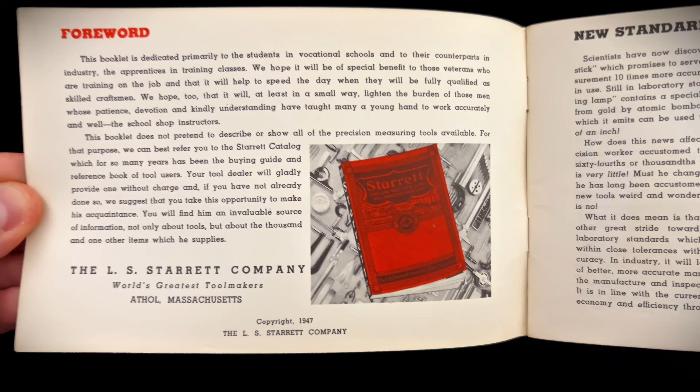Think about the last time you bought a new tool. You probably grabbed it off a rack in a big box store or ordered it online. It arrived in a sealed plastic clamshell with a barcode on it. You gave the company your money, they gave you a tool, and the transaction was instantly over. If you didn't know how to use it properly, well, that was your problem. Go watch a video and figure it out. That's the modern standard. But it wasn't always like this.

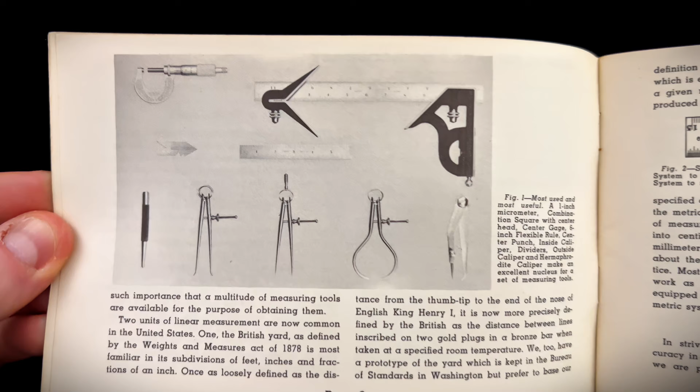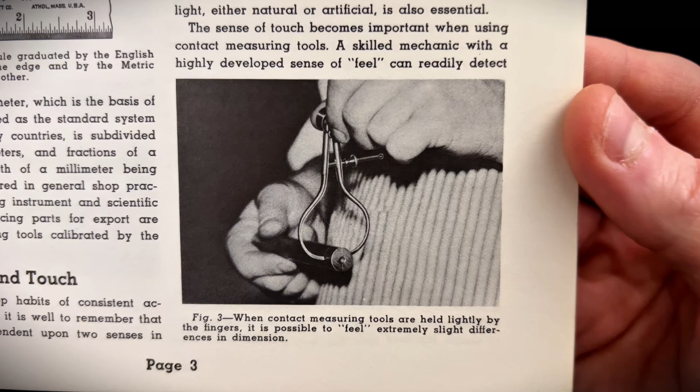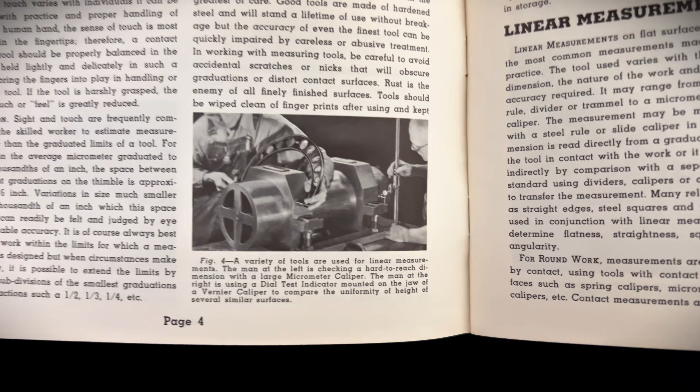There was a time when the company that sold you a tool also felt responsible for what happened after you bought it. Not in a legal sense, not because of liability, because they actually cared. If you go back to the 1940s, the relationship between the companies who made tools and the people who used them was completely different. Back then, when a company sold you a piece of precision equipment, they didn't just want to make a quick sale and move on to the next guy. And what you're looking at right now is proof of that.

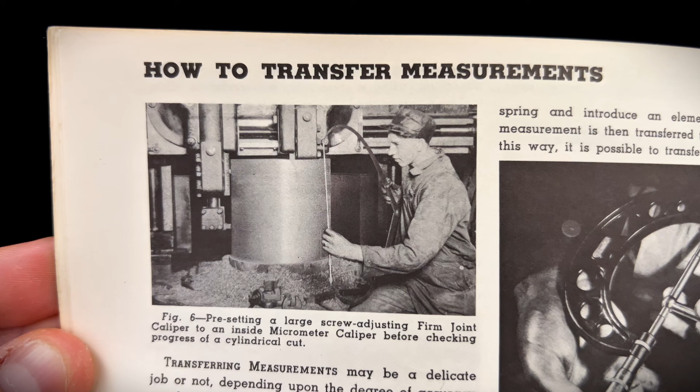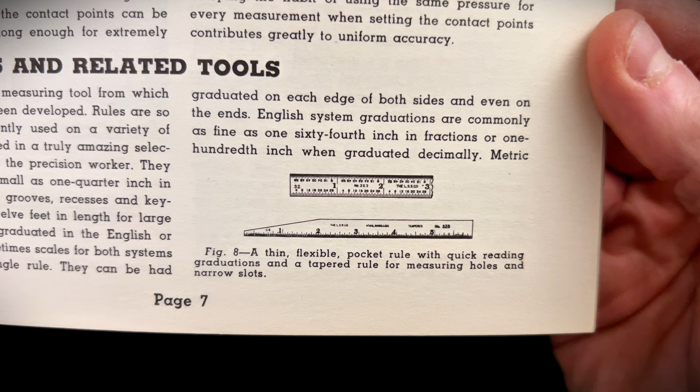This is a 1947 instructional booklet published by Starrett, one of the most respected precision tool manufacturers in American history. On the surface, it looks like a simple educational guide, or just an old catalog meant to sell micrometers and steel rules. But when you read what's inside, when you understand what they were actually doing here, it changes how you think about the relationship between a machinist and the company that equipped them.

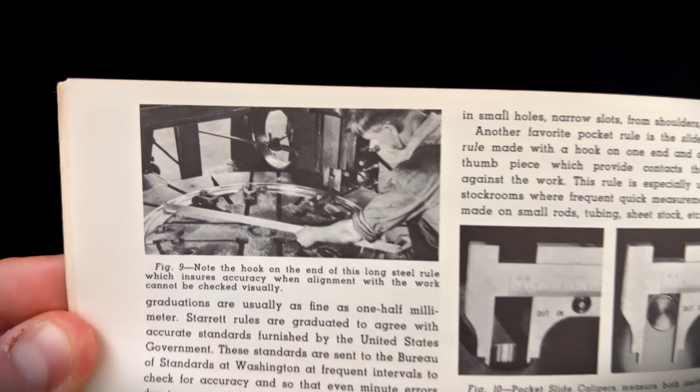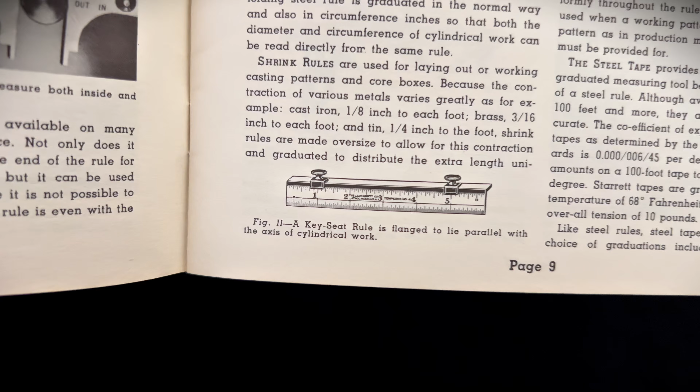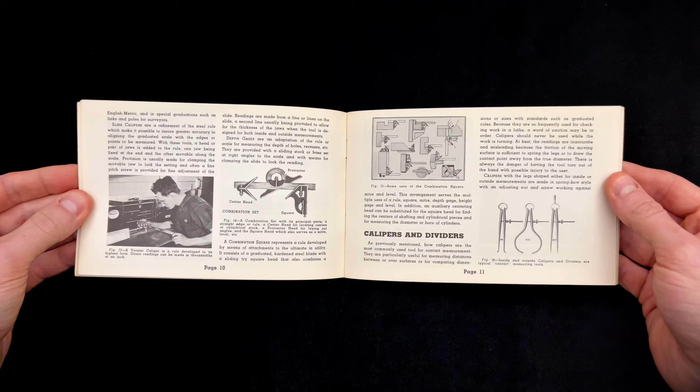On the inside cover, the very first thing Starrett tells you is who this book is for. They dedicated this booklet to the young people in vocational schools, to the apprentices on the factory floor, and to the veterans of World War II who were returning home to rebuild their lives in the machine shops of America. Think about what that means. They looked at a young person just entering the trade and said, 'We want to be part of your foundation.'

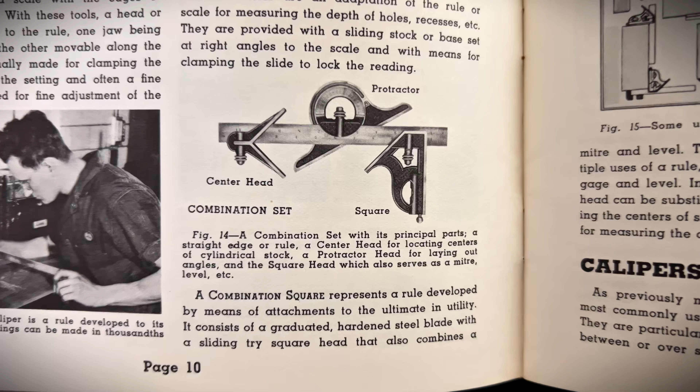We want to be there from the beginning. They also gave a specific nod to the seasoned tradespeople who were taking apprentices under their wing. Starrett understood that they were training the next generation of craftsmen and respected them. This booklet was, in part, a gift to those instructors, a resource they could put in the hands of every apprentice that came through their shop.

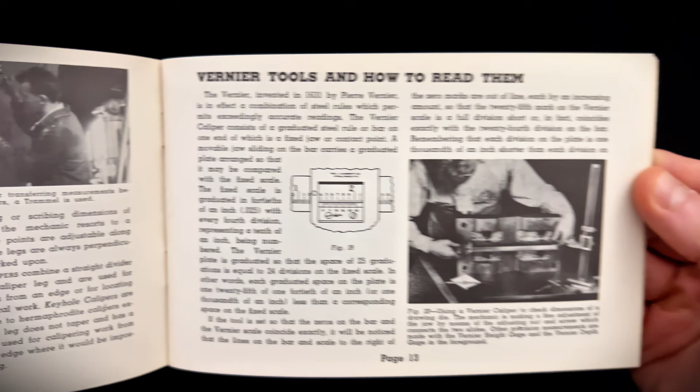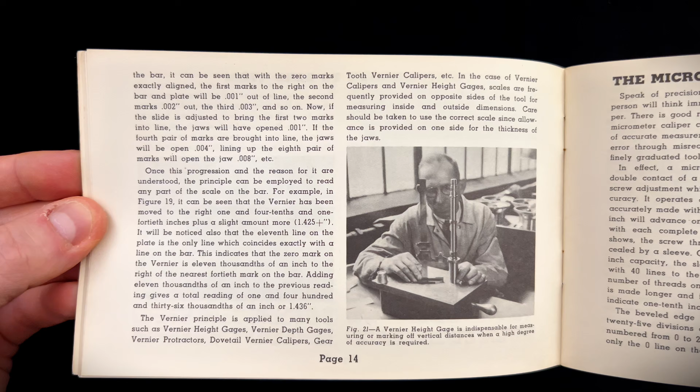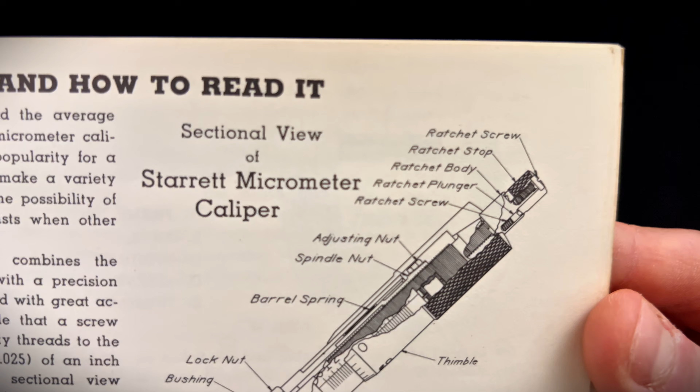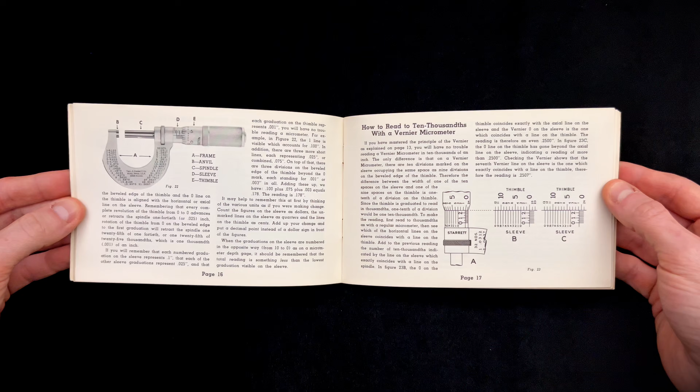The frame is the main body. The anvil and the spindle are the two faces that do the measuring. The part you turn is the thimble, and the main scale on the body is the hub. And then they include a step-by-step explanation of the measurement principle, taking it down so clearly that a first-year vocational school student could follow it. And to do this, they explain the classic dollars and cents method.

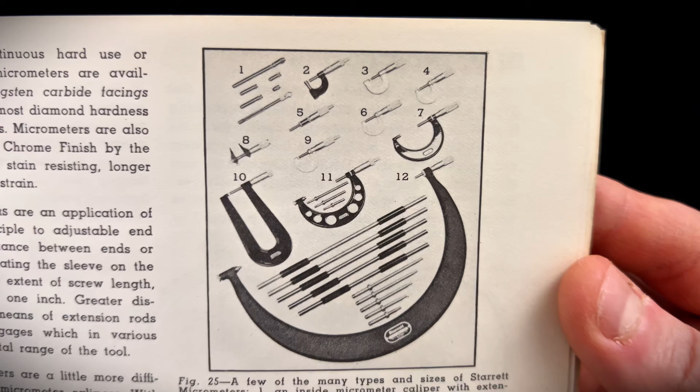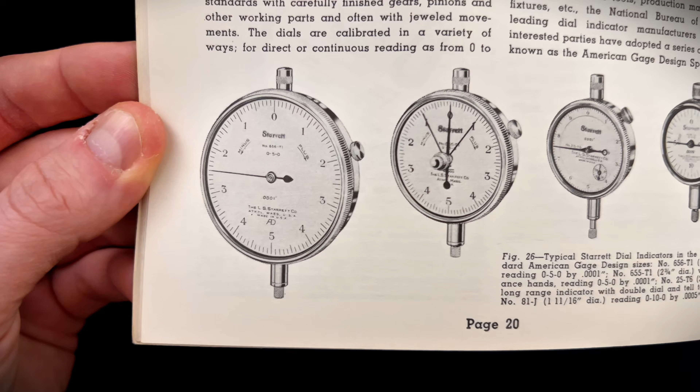Every full rotation of the thimble moves the spindle exactly 25 thousandths of an inch. The big numbers that run along the length of the hub are the dollars. So 1 is equal to 100 thousandths, or 0.100. The small lines between these numbers along the hub are the quarters, worth 25 thousandths each. And the numbers on the thimble, those are the pennies. Each one is 1,000th of an inch. That's the kind of care you would expect from an instructor, not an advertisement.

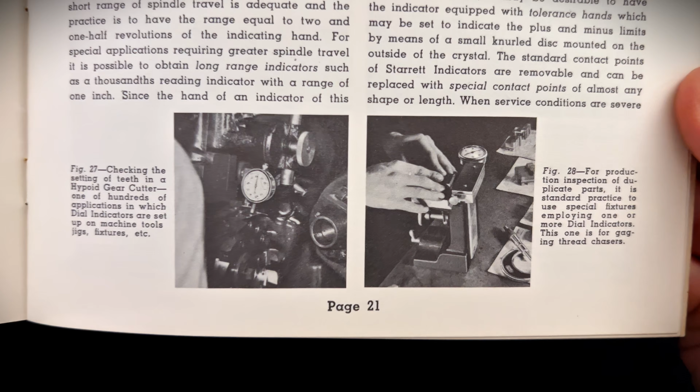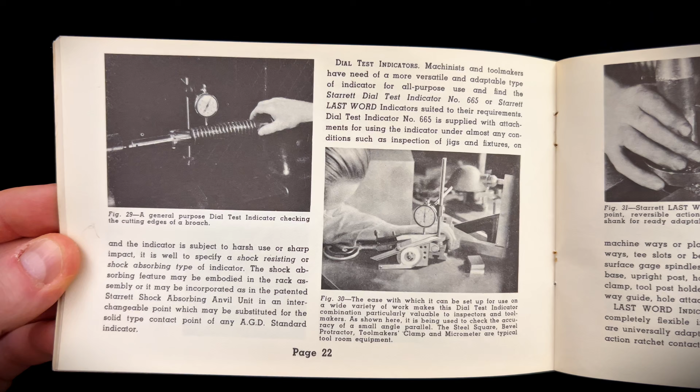But mastering the micrometer and other manual gauges wasn't just about doing the math. It was about developing the feel. Starrett knew that a micrometer measurement could easily be skewed or misread by heavy-handed ignorance. And that's why, in addition to reinforcing this throughout the booklet in the first few pages, Starrett dedicated an entire section to the importance of sight and touch, the two senses a precision machinist depends on.

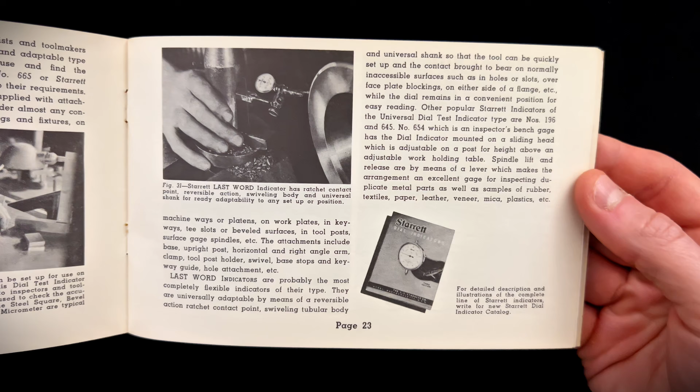They talk about how a skilled machinist has to develop their sense of feel in order to detect dimensional differences too small for the eye to catch. They describe how holding a contact tool lightly in the fingertips, rather than gripping it tightly, preserves that sensitivity.

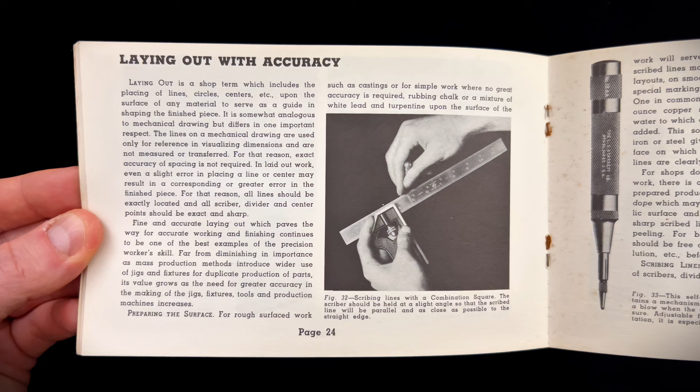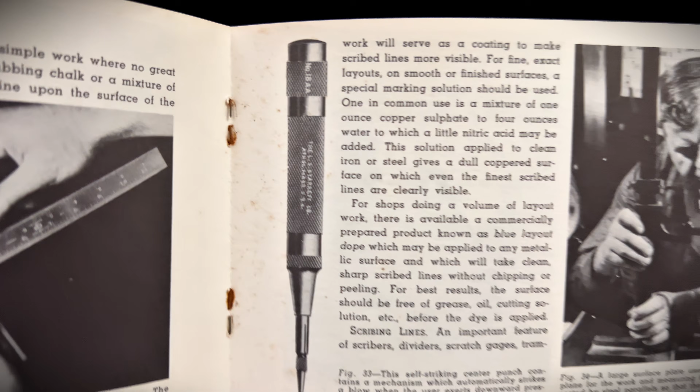They reinforce that a sense of touch can be developed over time with practice and patience. While this may be common knowledge in theory, the nuance of it is old-world knowledge, the kind of thing a master machinist passed down to his apprentice on the shop floor. Starrett put it in print so that every young man who opened this booklet had access to it, whether they had a mentor or not.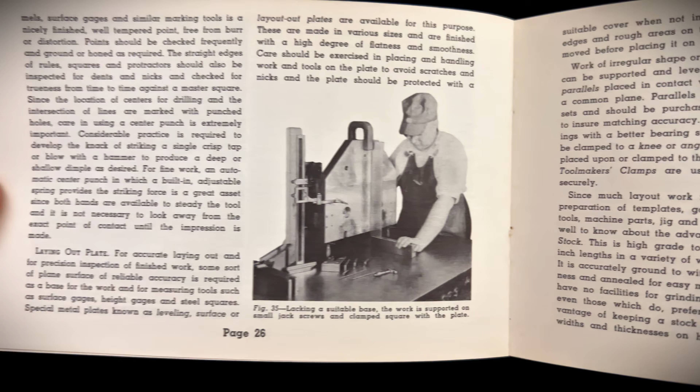By dedicating pages to the proper grip, the right amount of friction, and the deliberate calculation of the lines, they weren't just educating you. This also served as an insurance policy. This theme can be seen throughout this booklet. Starrett wasn't just printing these books out of the goodness of their hearts and care for their customers. There was a brilliant, calculated reason behind this level of education.

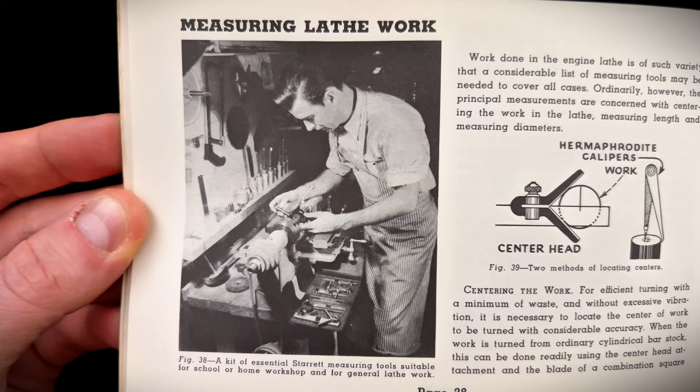A precision tool is only as accurate as the hands holding it. If a green apprentice grabs a brand new micrometer, cranks down on the thimble like it's a C-clamp, and gets a ruined measurement, who do you think they are going to blame? They're not going to blame their own lack of skill, they're going to blame the tool.

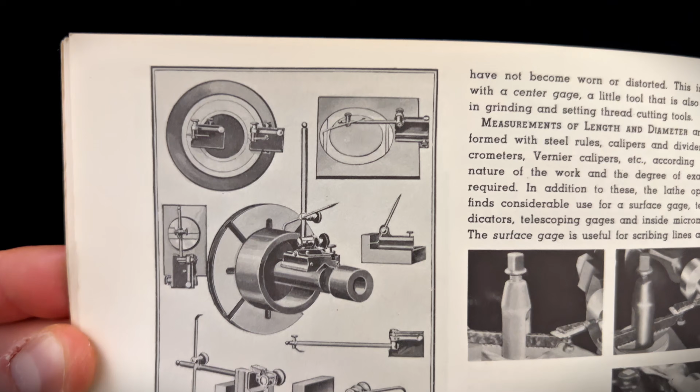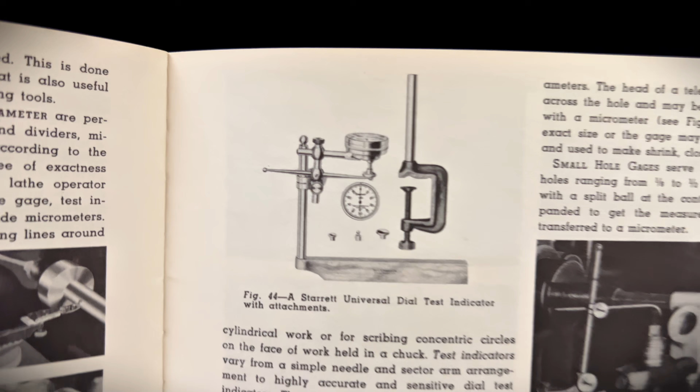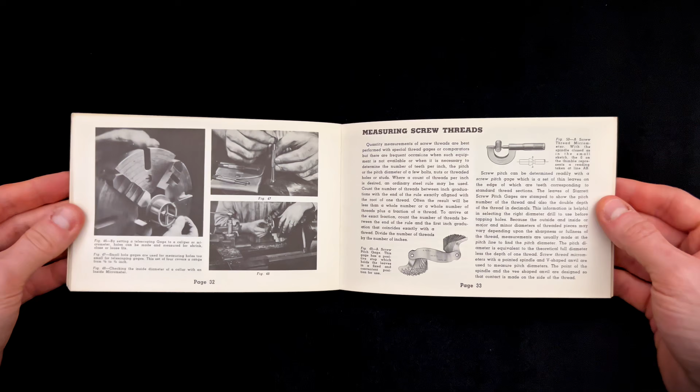Starrett understood that user error was the single greatest threat to their legendary reputation. By teaching the American machinist exactly how to hold, feel, and read these instruments properly, they were protecting their own legacy. They weren't just educating a workforce, they were actively bulletproofing their brand against the dangerous combination of high precision and low experience.

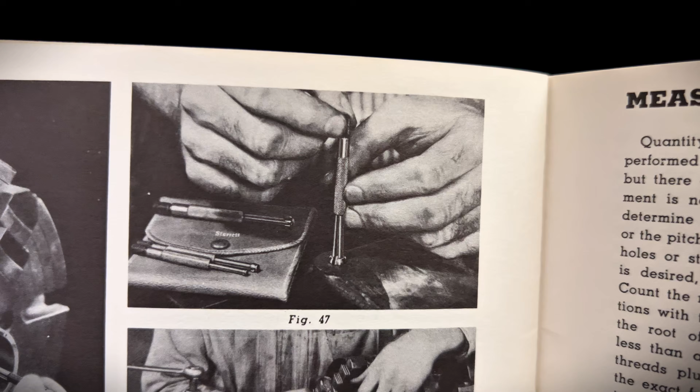On the topic of not just understanding how to use these tools, but understanding the nuances of it, in the following pages Starrett shares another one of the most important lessons in the manual, which is the critical importance of specifying the correct tolerances.

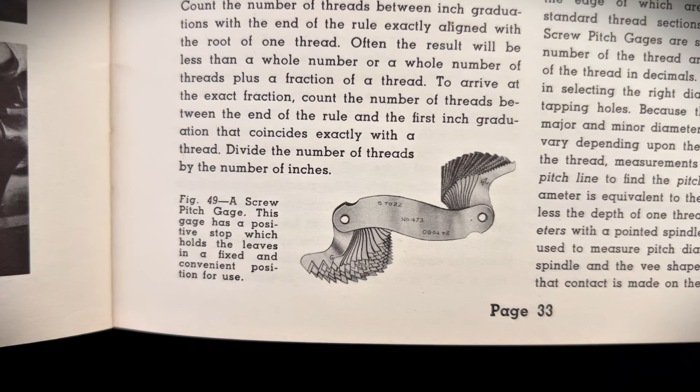The most obvious sign of an inexperienced engineer is one who overspecifies tolerances. This booklet makes it very clear that specifying a limit tighter than the job actually requires isn't a sign of a better craftsman, it's a sign of a wasteful one. Every extra decimal point of precision adds exponential cost, machine wear, and time.

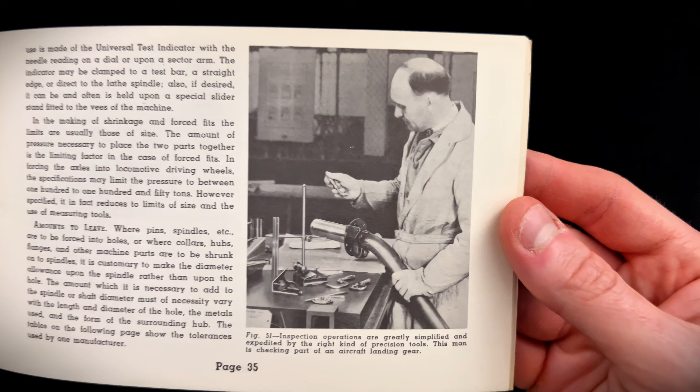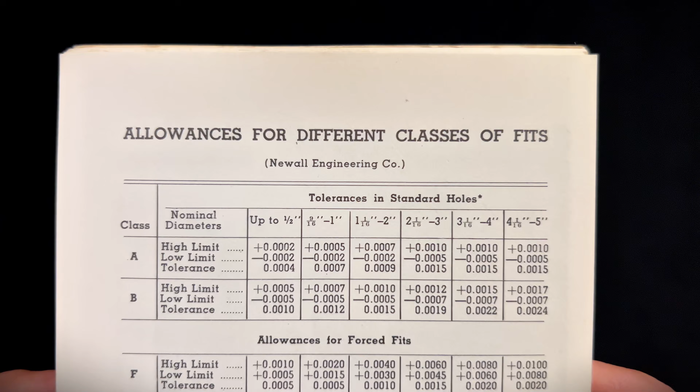To help you avoid this, Starrett provided detailed tables of standard fits, ranging from loose running fits to heavy force fits. These tables were designed to ensure that parts would actually function together in the real world, without wasting hours of precision labor on a dimension that didn't require it.

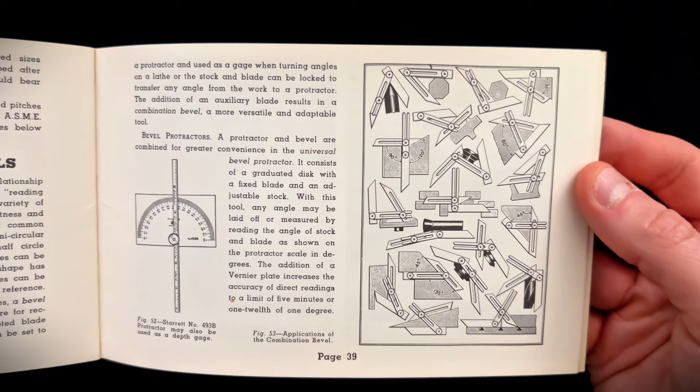They wanted to teach you that true mastery is about hitting the correct tolerance, not just the tightest one, because in a high production shop, over-engineering a tolerance is just as bad as missing it. By following these tables, a machinist could ensure perfect mechanical function without the unnecessary perfection that kills a shop's productivity.

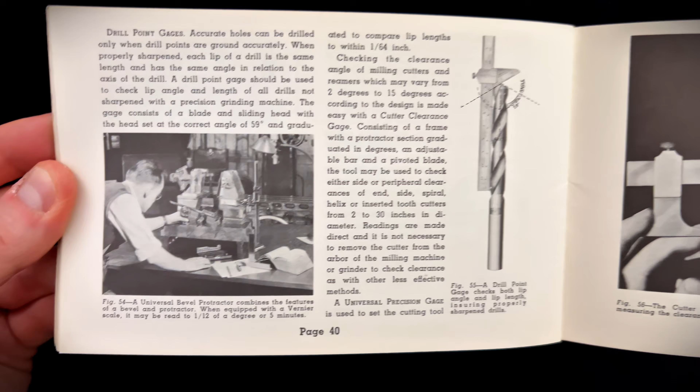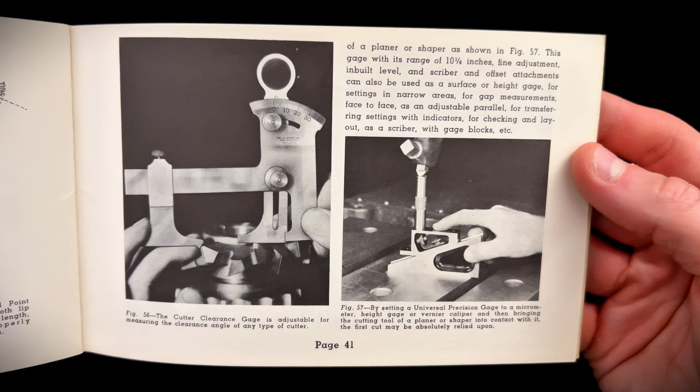But the real genius of this booklet isn't just in the measuring instructions. As we flip towards the end, you won't find a desperate sales pitch or an order form. Instead, Starrett packed it with more reference tables, including decimal equivalents, tap drill sizes, and wire gauges.

They knew that a working machinist relied on having this information on hand, so they gave you the ultimate cheat sheet. By including these tables, Starrett guaranteed that this little book wouldn't just be read once and thrown in the trash. It was designed to live permanently in the top drawer of your Gerstner chest, or covered in oil right inside the breast pocket of your shop apron.

They understood the daily reality of the American shop floor, and they wanted to be the silent partner, helping you get through every single shift.

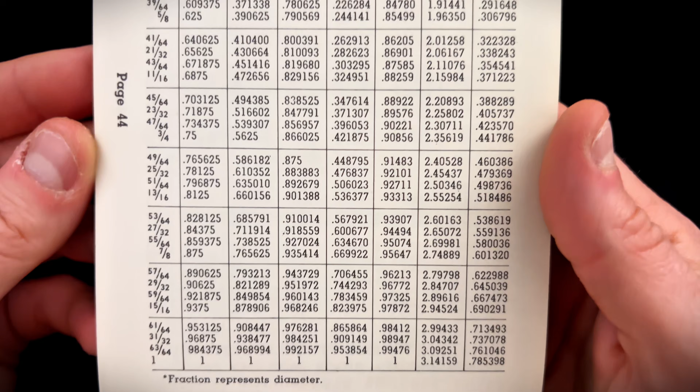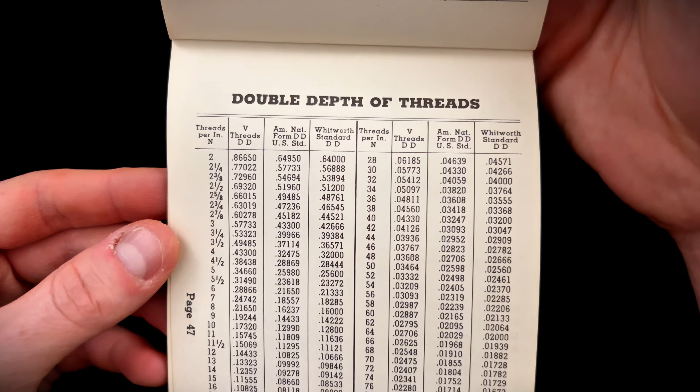It's hard to look through a book like this and not feel a sense of loss. While Starrett still proudly publishes free literature on how to use their tools, today most of the tool companies out there have been bought up by massive conglomerates who are too busy shaving pennies off manufacturing costs to print educational books for young machinists. But in 1947, companies like Starrett knew that the greatest tool in any shop wasn't made of hardened steel. It was the mind of the craftsman using it.

If you still have one of these old Starrett reference books in your shop, hold on to it. It's proof of a time when companies truly cared about their customers.